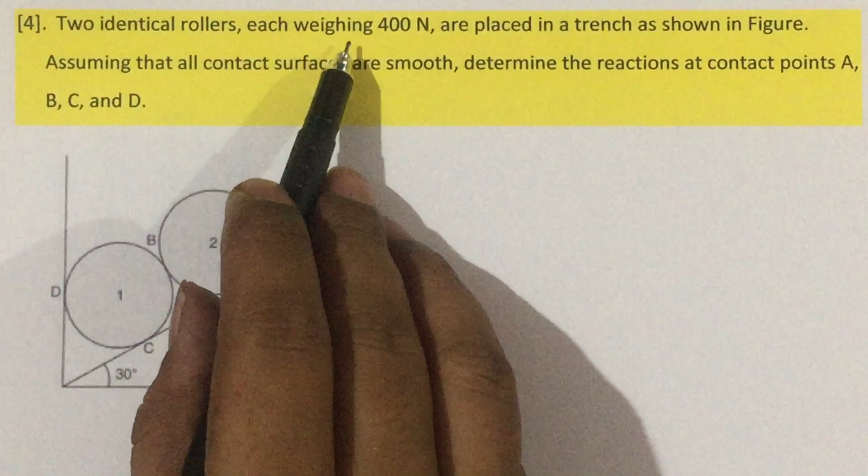Hi, the problem number 4. Two identical rollers, each weighing 400 Newton, are placed in a trench as shown in the figure. Assuming that all the contact surfaces are smooth, determine the reaction at contact points A, B, C and D.

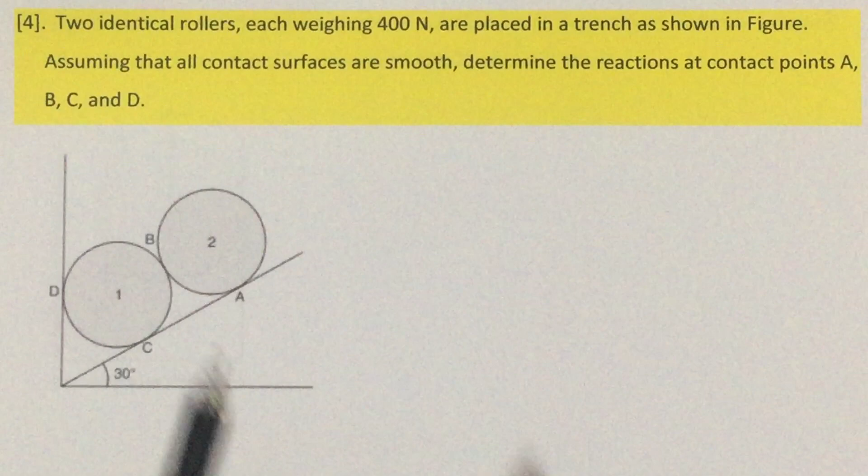These two balls are identical, meaning they are same in all the properties - it may be the weight or the radius or anything. The weight and radius are the same. So since we have two balls, we are going to write two free body diagrams.

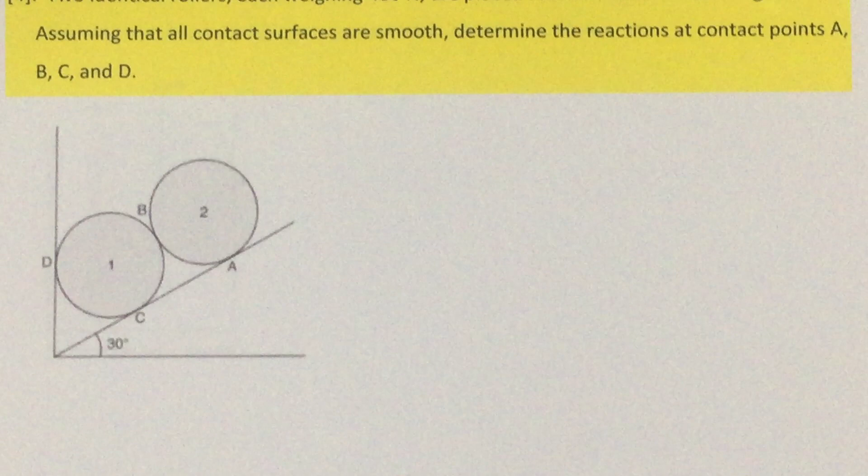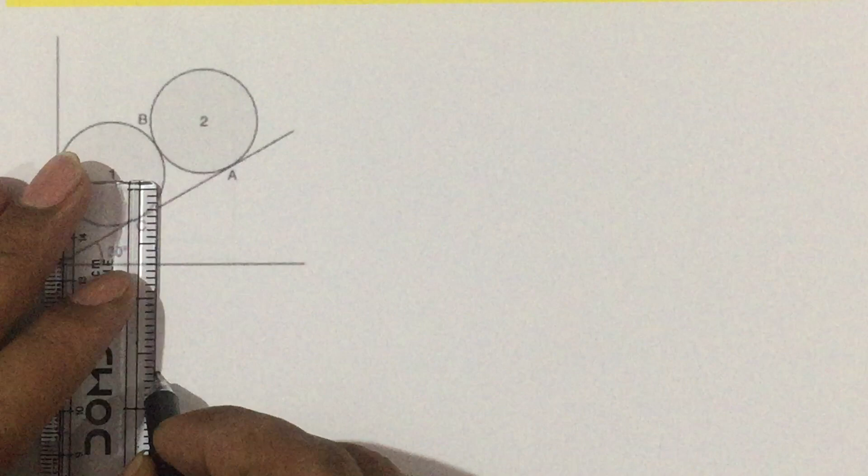For the first ball, first write the point, then write the connected line. This is the center, this is the contact point. First write the weight line - the weight always acts vertically. Then to the D point, draw one line, that will be the reaction line. Then from the center to the C point, draw one line.

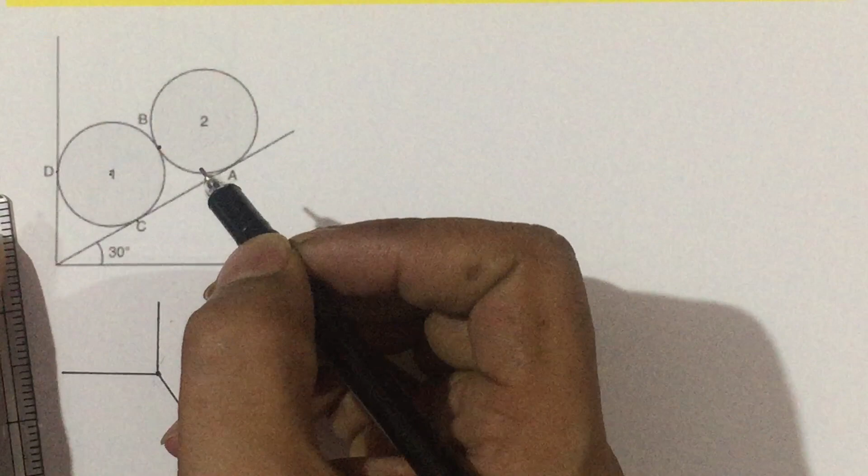This ball and this ball are contacted at the B point, so join center of this ball to the center of this ball. You will get the reaction in this direction, so draw one reaction.

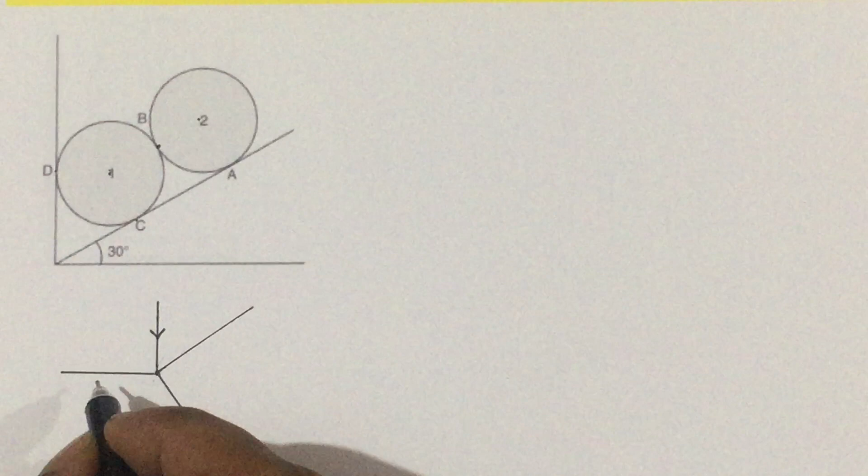So point is over, line is over. Next one is the direction. The weight acts vertically downwards. Then all three are compression reactions, so inward arrow.

Then magnitude - the weight of the ball is given by 400 Newton. Then this is reaction at D, reaction at C, reaction at B point.

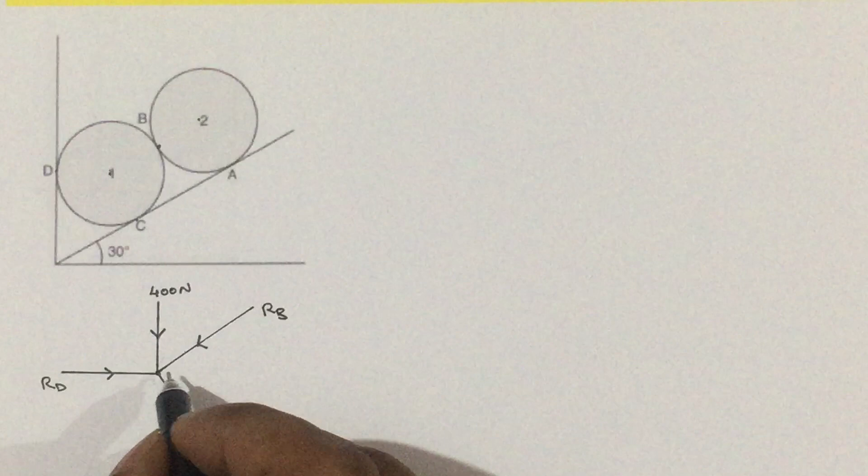Lastly, we need angles. For that, draw a plus mark at the point. This inclined line is making 30 degrees with respect to horizontal. Then perpendicular reaction line at C will make the same 30 degrees, but with respect to vertical. Since vertical it is 30, therefore with respect to horizontal it will become 60.

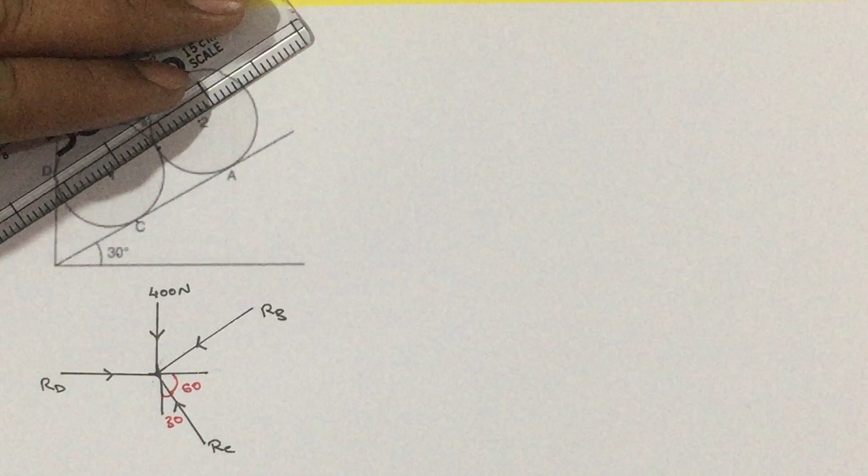Then what about this line RB? RB is the reaction line, that is the line joining the center to center of these two circles. Now if we write a line here, that line will become the RB line. This line is parallel to this inclined line - these two are parallel lines.

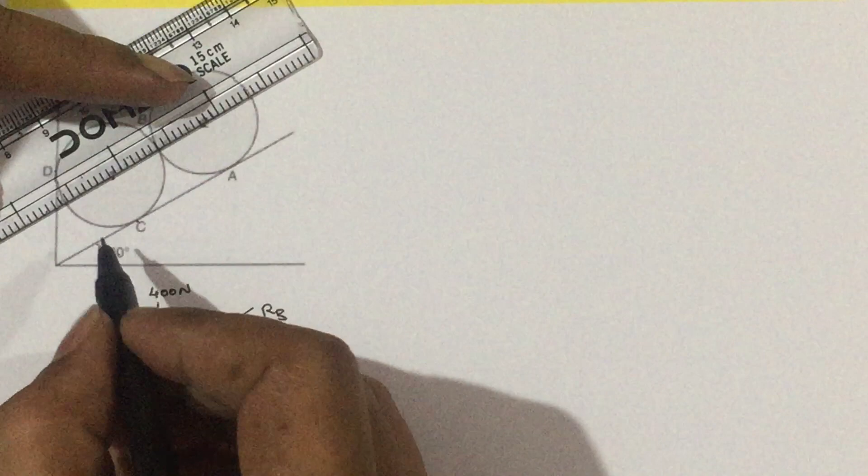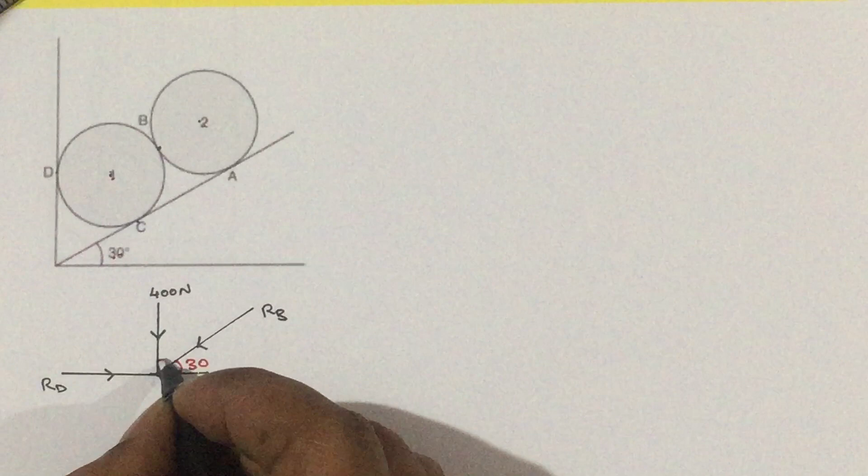Parallel lines will make the same angle with respect to the same reference, so the parallel line will make the same 30 degrees with respect to horizontal. So the remaining one is 60. It is 90, it is also 90. So we can write this is the free body diagram

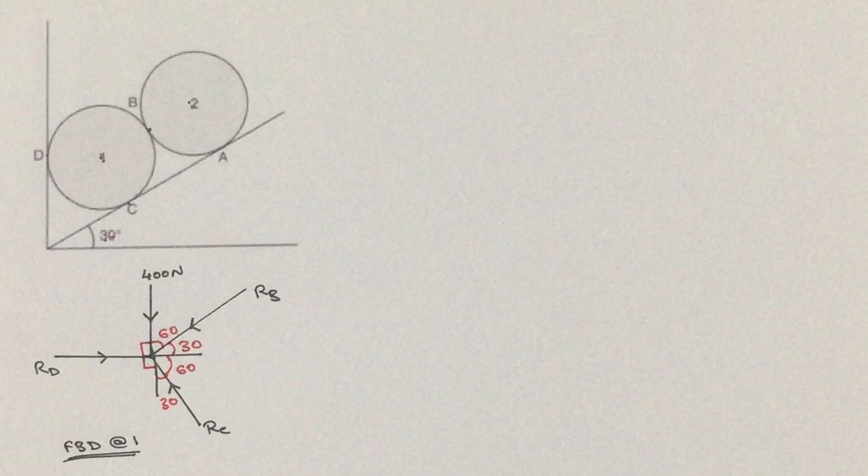Then like that we will write the free body diagram for the second ball. Just write the point, then write the connected lines. First of all, the weight always acts vertically. Then the reaction lines - this ball and this ball have the contact point here, so join it.

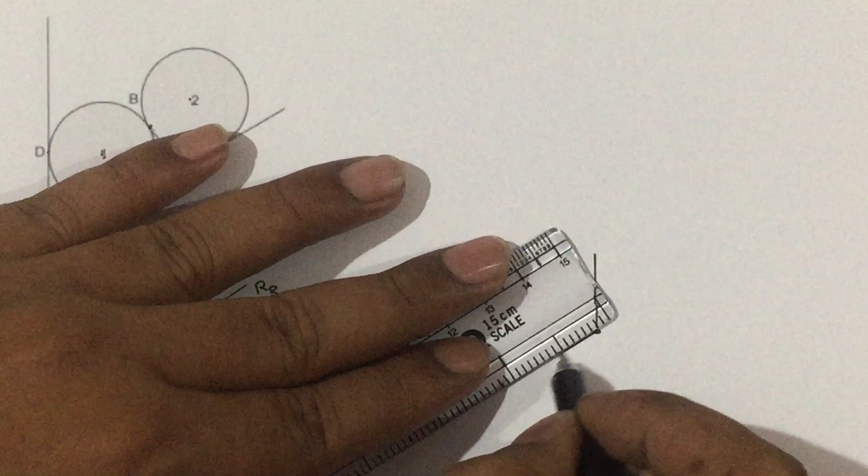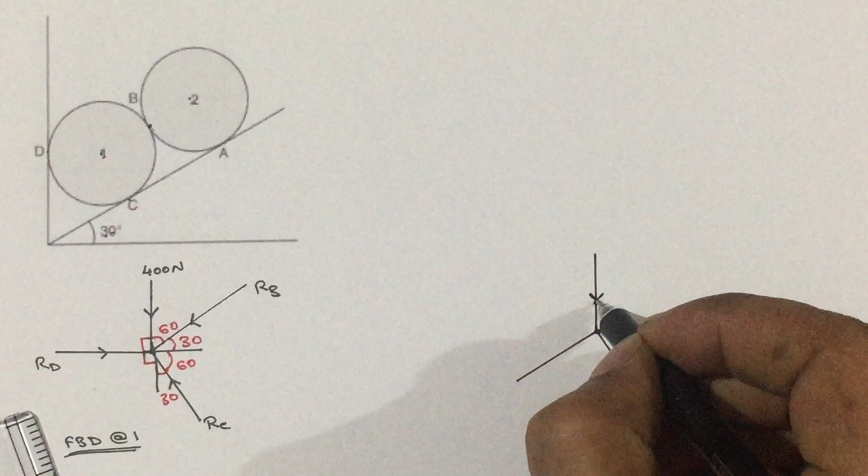Then with respect to A point, contact point. Then direction - weight acting vertically downward. Then these two are the compression reactions, this will act towards the point. Then we need magnitude - the weight of the second ball is also 400 Newton.

This one is the reaction at B point and this one is the reaction at A point.

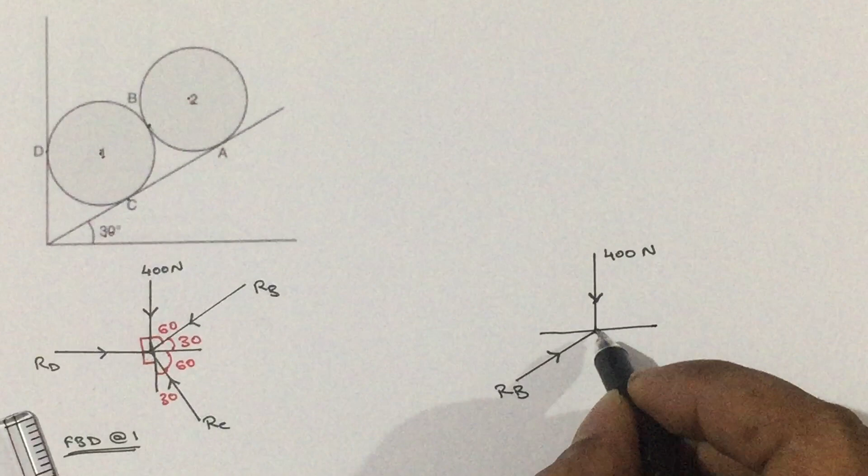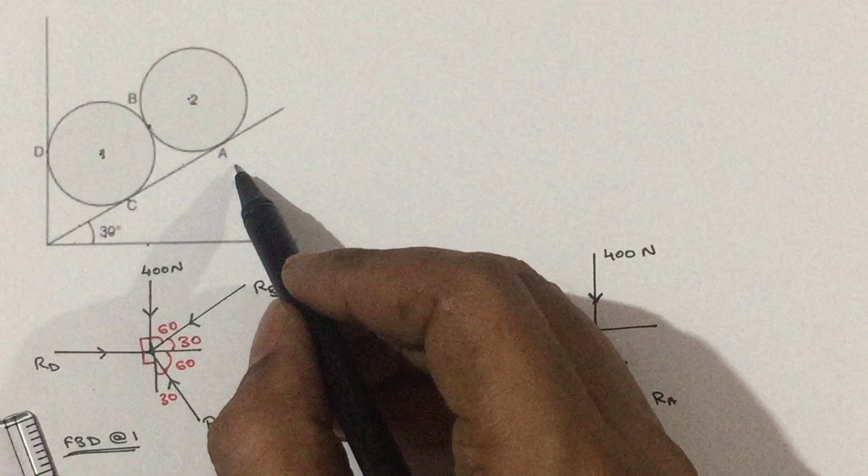Then we need angles. For that, draw a plus mark at the point. This inclined line is making 30 with respect to horizontal. Then perpendicular reaction at A point will make the same 30 degrees, but with respect to vertical. If it is 30, then the remaining one is

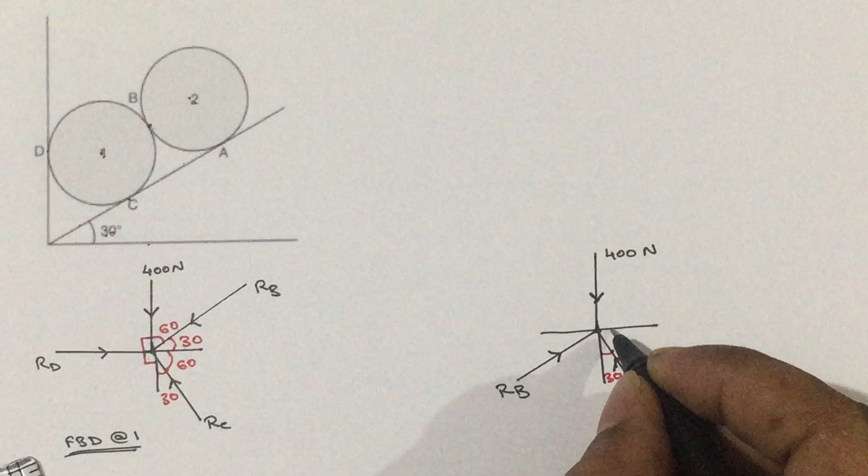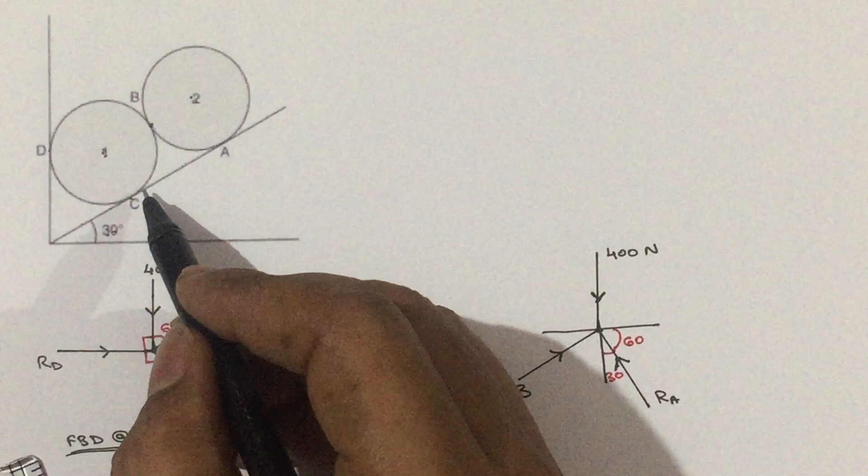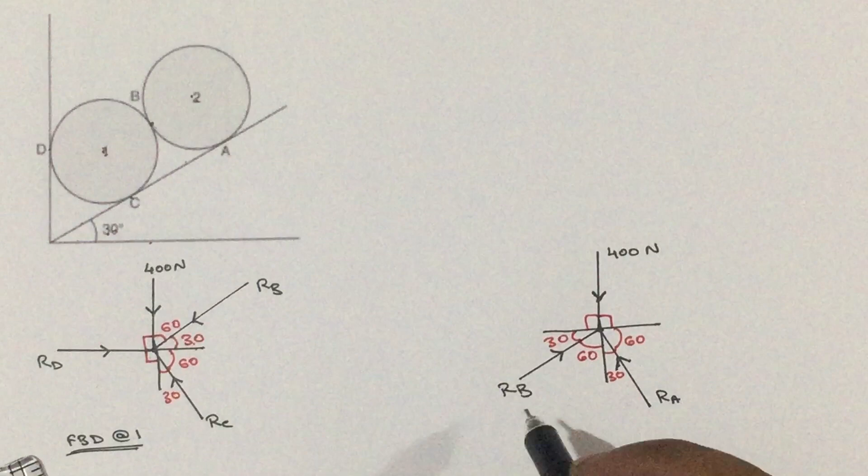60. Then RB line, as we said earlier, is nothing but a line joining the center points 1 and 2. This line is parallel to this line, so parallel lines will make the same angle with respect to the same reference. So RB is making 30 with respect to horizontal, then with respect to vertical it will become 60, this is 90, this is also 90. So this will be the free body diagram at 2.

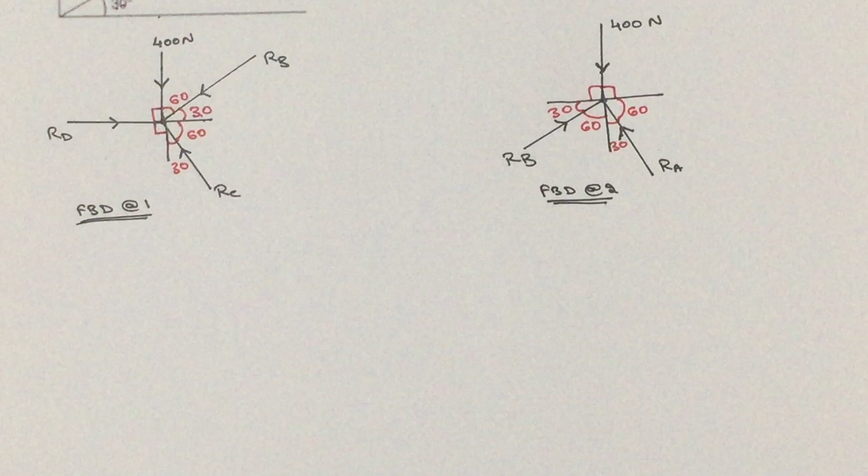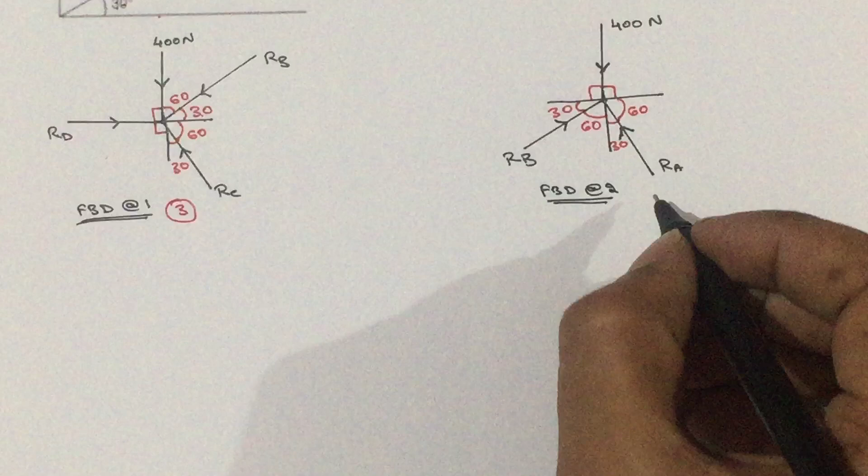Now we have two free body diagrams. We need to choose the free body diagram. For that, count the number of unknowns. Here we have RD, RC, RB - 3 unknowns. Here we have RB, RA - 2 unknowns. So, select the free body diagram which has less number of unknowns.

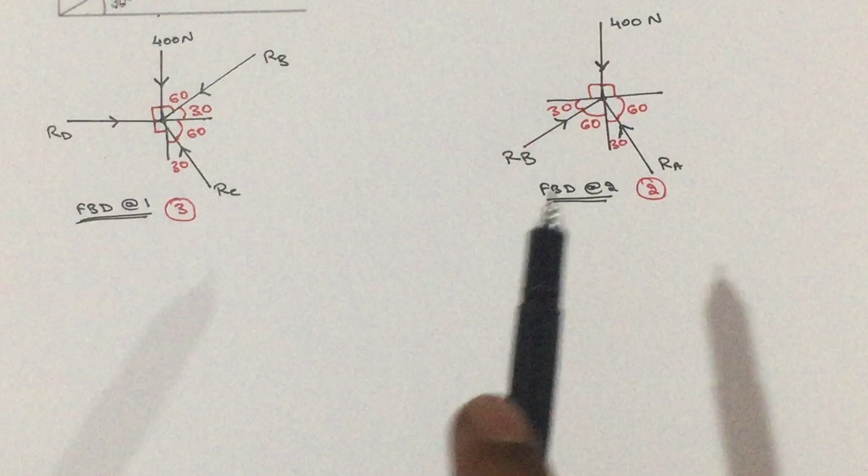Now, choose the method. For that, count the number of forces: 1, 2, 3. Then count the number of unknowns: 1, 2. If there are 3 forces and 2 unknowns, we can solve this problem by using Lami's theorem. So, by Lami's theorem...

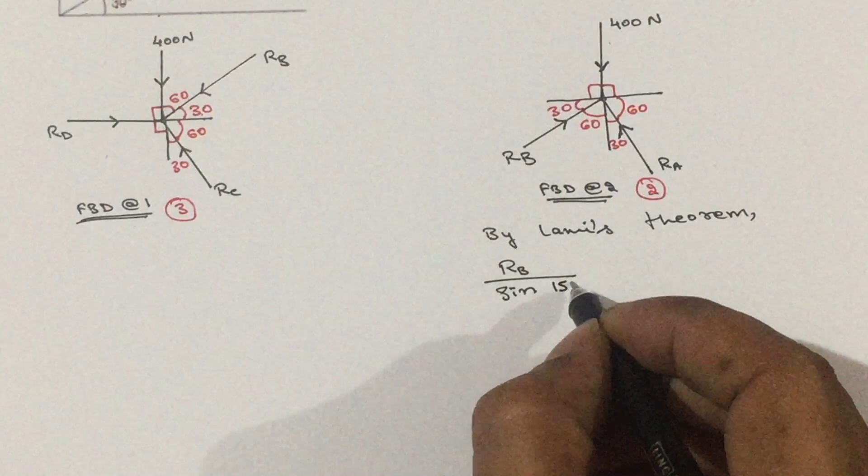Write the Lami's equation. First write the unknowns. RB divided by sine of angle between other two forces, 90 plus 60, that is 150, equals RA divided by sine of angle between other two forces, 90 plus 30, that is 120, equals the next force 400 divided by sine of angle between other two forces, 60 plus 30, that is 90.

We have 3 parts. Select 2 parts such that there should be only one unknown. Select the first part and the last part and cross multiply. You will get RB is equal to 400 divided by sine of 90 multiplied by sine of 150. So, you will get RB as 200 Newton.

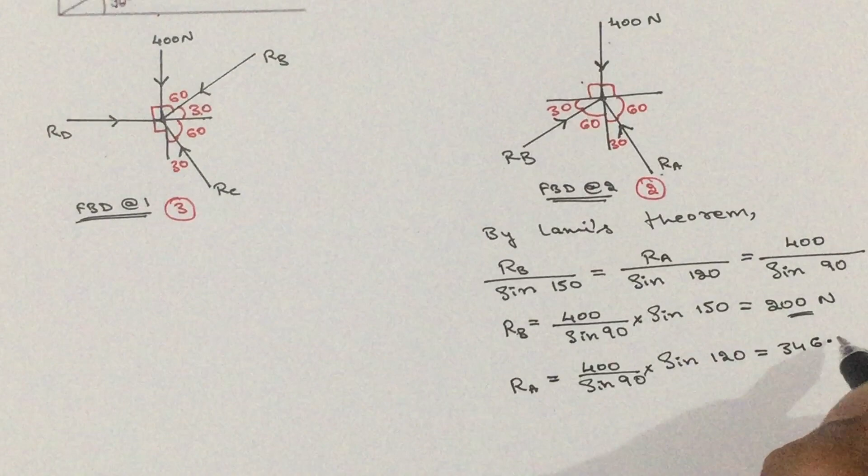Then select the second part and the last part, cross multiply. RA you are going to get it as 400 divided by sine 90 multiplied by sine of 120. You are going to get that one as 346.410 newtons. Okay, once we are done with this one, let us go back to the next free body diagram.

Here we have 3 unknowns RD, RC and RB, but RB we have calculated from this free body diagram. We got that one as 200. So write it here, RB is equal to 200.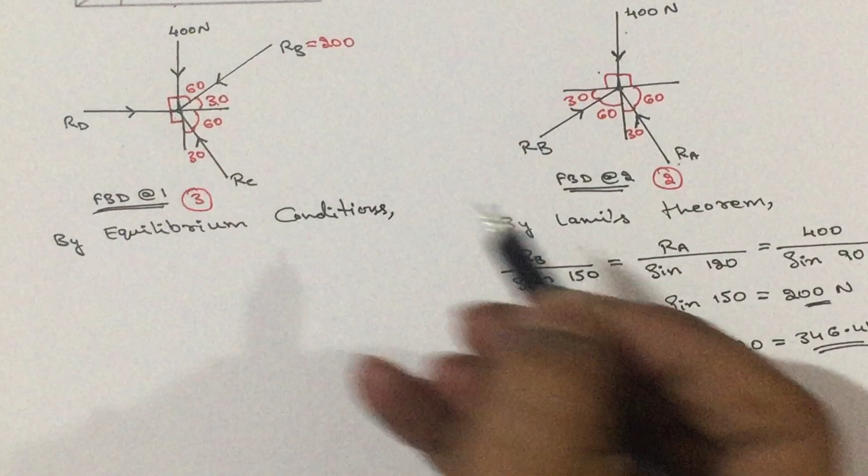Now, choose the method. For that, count the number of forces: 1, 2, 3, 4. Since we have 4 forces, we will solve this problem by using equilibrium conditions. We have 2 conditions here, that is sigma Fx equals 0 and sigma Fy equals 0.

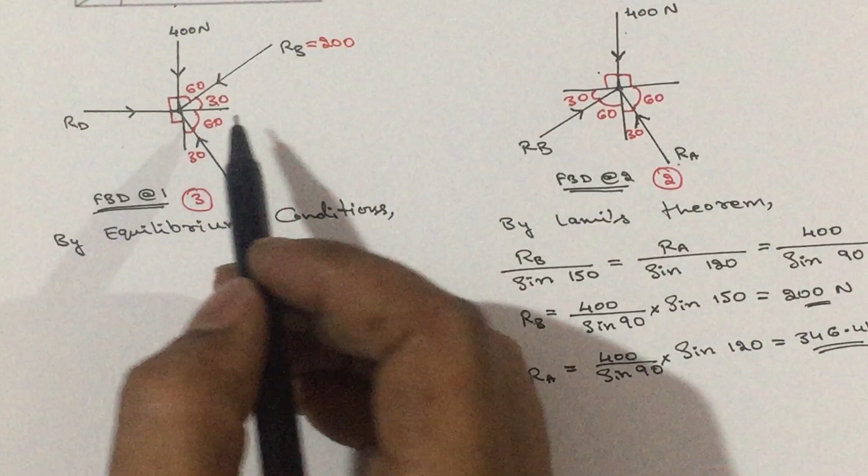Before applying the conditions, let us calculate theta and split up the inclined forces. For these 2 forces, horizontal angle theta is already given. Then splitting, behind the arrowhead draw nearby horizontal line, nearby vertical line, nearby horizontal and nearby vertical line.

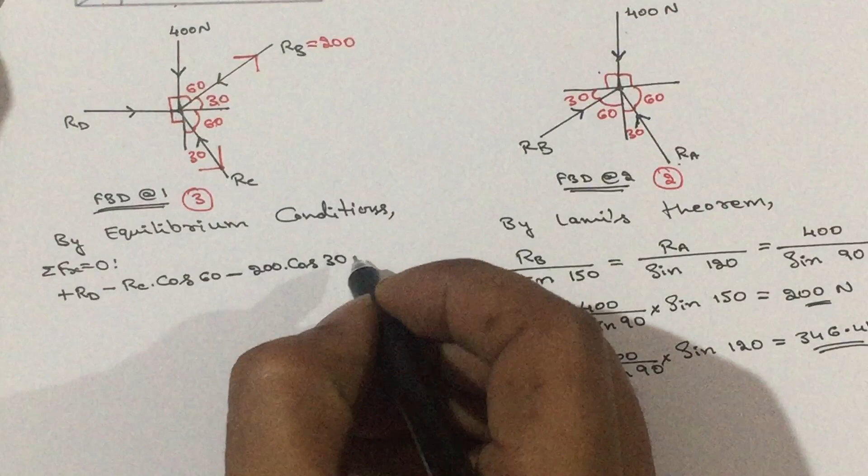Then apply the condition, sigma Fx equals 0, only horizontal force and horizontal component. I will start from this force: this is plus RD, then horizontal component leftward minus component is F cos theta, that is RC into cos of horizontal angle 60 degrees, vertical component leave it, then horizontal component moving leftward minus, 200 into cos of horizontal angle 30, vertical component leave it, vertical force leave it, that should be equal to 0.

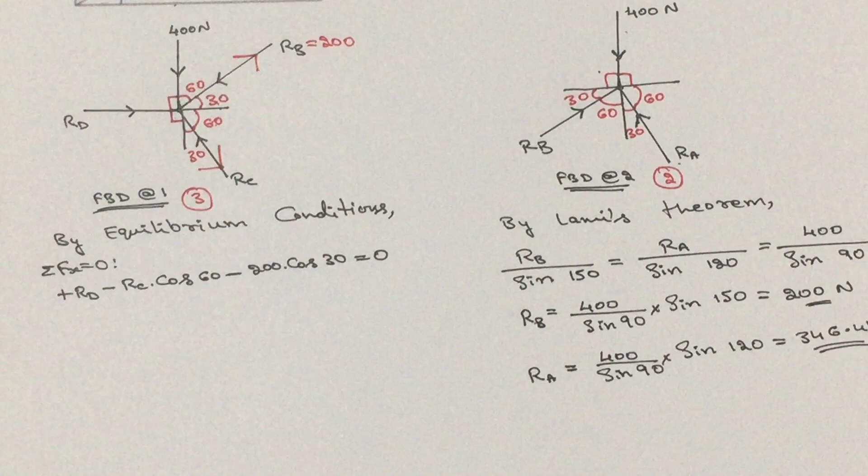So, here in this equation we have 2 unknowns, they are RC and RD. So let us keep that as it is, equation 1.

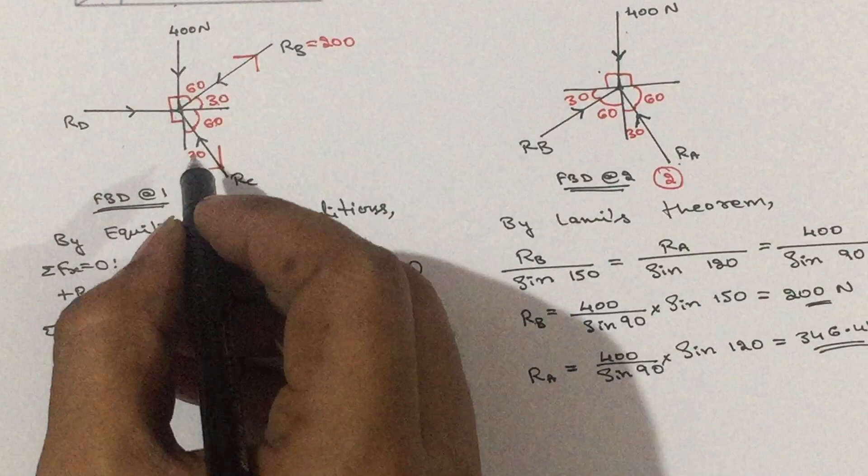Then let us apply sigma Fy equals 0. If we apply sigma Fy equals 0, only the vertical force and vertical component. I will start from this one: this is horizontal, leave it, horizontal component leave it, vertical component going upward, so plus component is F sin theta, that is RC into sine of horizontal angle 60. Then here horizontal component leave it, vertical component moving downward, minus F sin theta, that is 200 into sine of horizontal angle 30. Then vertical force, that is minus 400, that should be equal to 0.

In this equation the unknown is RC. So, upon calculation you will get RC as 577.850 newtons.

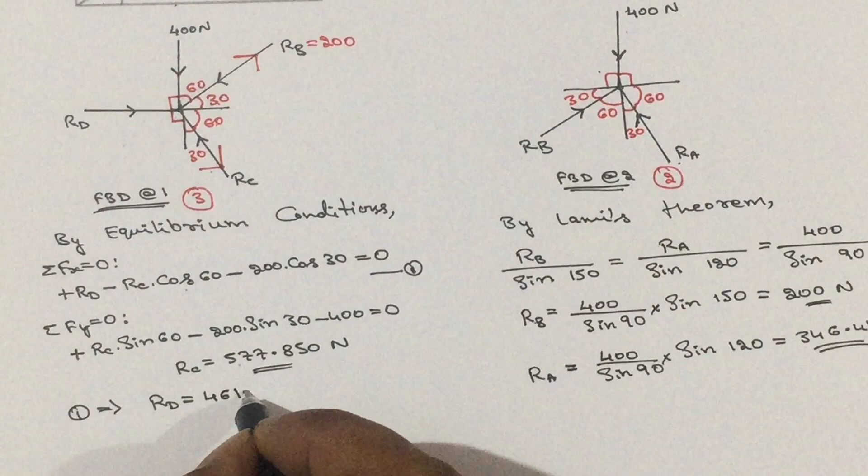Once you get RC, substitute this RC value in equation 1. So, you are going to get RD as 461.880 newtons.

Okay, that is all for this problem. Here what you can do is, initially you count the unknowns in the horizontal direction and in the vertical direction.

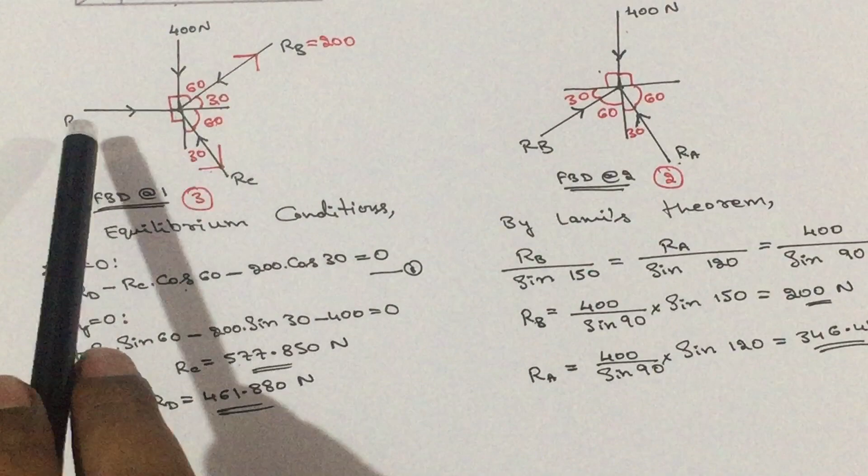In the horizontal direction we have RD, then horizontal component of RC, two unknowns. In the vertical direction we have only the vertical component of RC. So, if we count the number of unknowns in the horizontal as well as vertical direction, you will come to know which condition you can take first. Since we have only one unknown in the vertical direction, you can take sigma Fy equals 0, you will get RC, then you can calculate sigma Fx equals 0, so that RC will be known, you can directly substitute. This step will not be needed then.

Okay, that is all for this problem. Thank you.